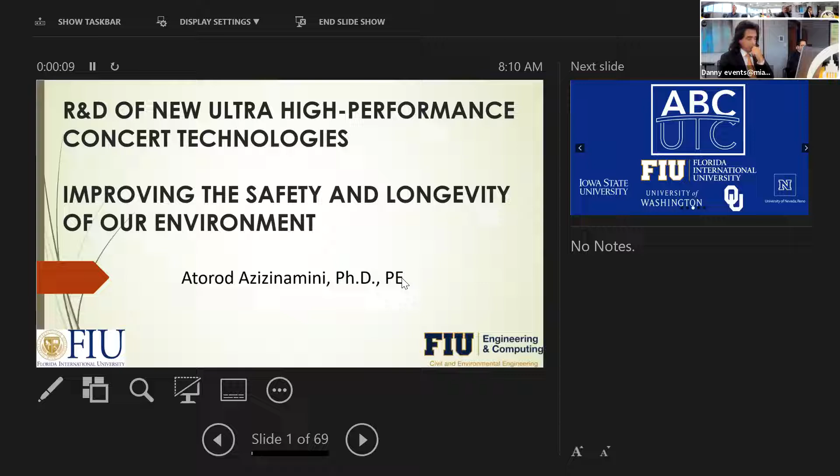Okay. All right. So, since 2013, we received funding from the USDOT. The funding from the federal government is about $1.5 million a year. And it's very competitive. There were close to 200 proposals, and then we were selected to work in bridge engineering.

And we've been continuously funded since 2013, and the recompetition actually is coming up because of the infrastructure bill that passed, so there's going to be recompetition again. So FIU is the lead, and we've got Iowa State, University of Washington, University of Oklahoma, and University of Nevada, Reno as partner universities.

Some of the technology that we are developing, that we have developed, has application to bridge engineering, but also has equal applicability to buildings, especially with some of the challenges we've seen after the Champlain Tower collapse.

So just to give you an idea of who we communicate with and what we do, I always say probably we are the best kept secret in South Florida, and I don't know what the reason is. I think probably the reason is that we get so much federal funding that in the past we have focused on addressing the problem at the federal level, at the national levels.

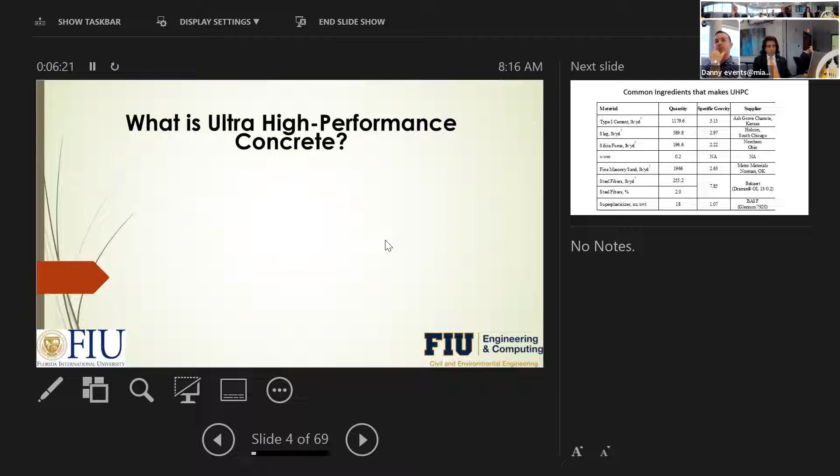UHPC was originally a product. It's a cementitious based product that was developed in France by Lafarge, and then they came to the US, and there's a proprietary version of it that is being marketed. It's really opening lots of opportunity for us, both in buildings and bridges.

I'm going to show you some ideas. If you want to know the recipe to make your own UHPC, I'll give you a copy—it's no secret. In fact, we have developed a non-proprietary version of this UHPC. Our idea is to make this available to everyone because we're more interested in application, not so much the material aspect.

The non-proprietary version that we've developed costs a fraction of the proprietary one. I'll give you some idea: regular concrete costs, let's say, about $200 per unit.

The proprietary version of UHPC on the market is very expensive, but you don't use as much—that's a big factor. It can go up to $4,000 or $5,000. But the non-proprietary version that we have can be at $800. That's significantly lower, and that's what we've developed.

Other agencies and institutions have developed it too, and I think within the next 5 years, you're going to see the price of UHPC produced around $800.

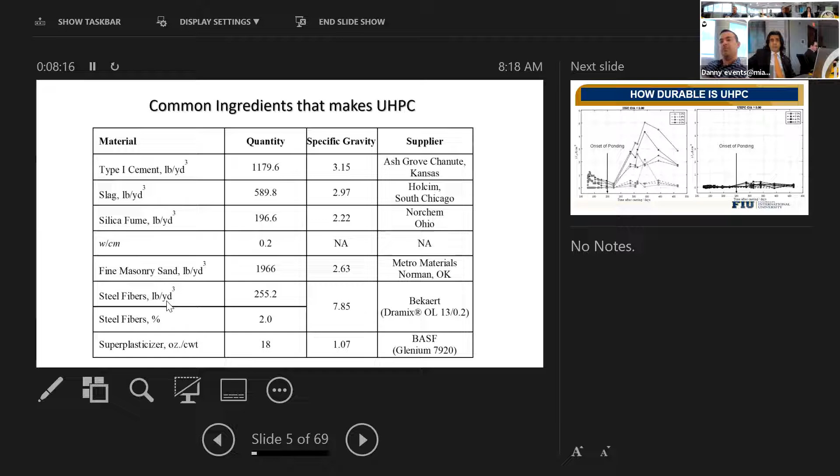For building applications, later on I'll show you an example of how much economy you get if you use it in high-rise buildings. You can bring the cost down because you don't need the fibers—the major cost of this material, since it's expensive, is fibers. But in high-rise buildings, in most elements, you don't need that. Then you can bring the cost down to almost $350, and the economy you get is significant.

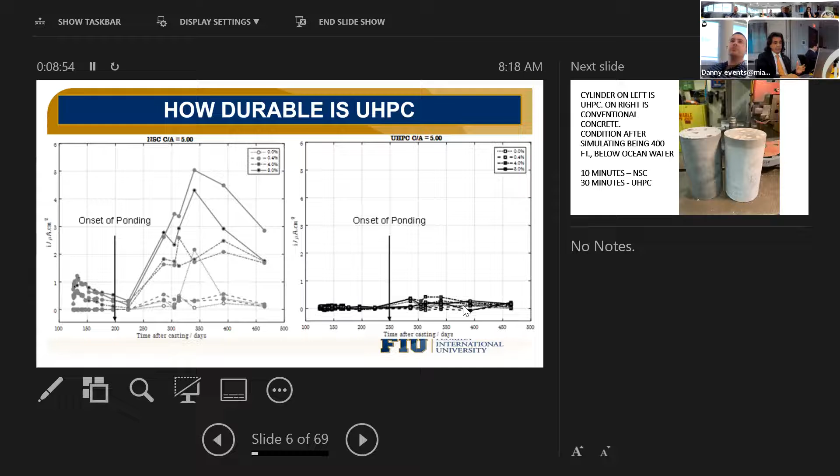This is a little better. We've very recently developed a non-destructive technique where in 10 minutes you can compare the durability of any concrete. Basically, we take cylinders and simulate that cylinder being under 400 feet of ocean water. Again, it's a patented product we've developed, but it's a very fast, quick test. For example, I can go to a building and do this test in 10 minutes. Right now we're developing a reference basis to compare the quality of this concrete to what else we have.

On the right-hand side, you see regular concrete used in construction. On the left-hand side, you see UHPC. The regular concrete on the right was simulated under 400 feet of ocean water for 10 minutes, and you see a ring above that, meaning the water seeped through. The UHPC on the left was simulated under the same 400 feet of water but for 30 minutes, and absolutely nothing went through it. So this is how durable this concrete is.

So if you have, for example, a high-rise building where you know the parking garage is going to be basically soaked, like a swimming pool during a king tide, just cover it with half an inch or one inch of this material. Or if you have a column that just needs fixing, all you need to do is patch it up.

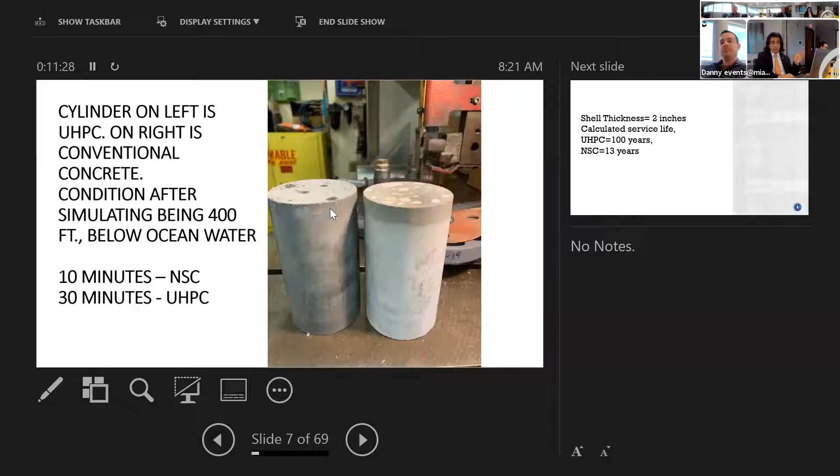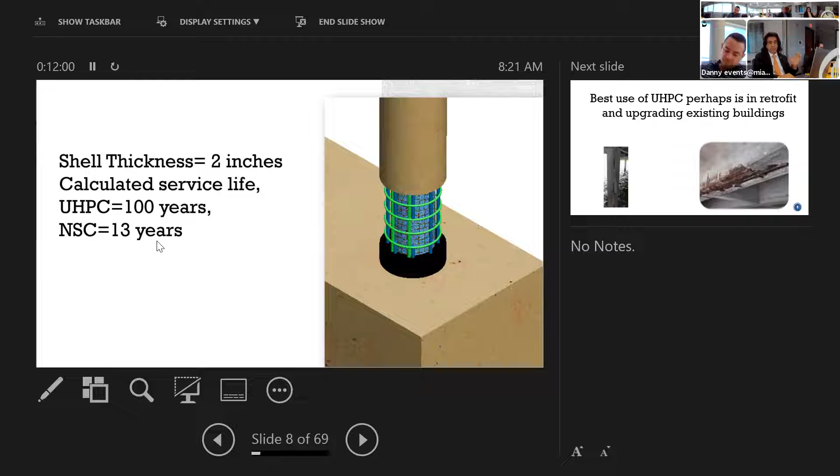This UHPC's best application really is for retrofitting - not building something new, but retrofitting and upgrading structures. You can bring it to a condition better than the original. Just to give you an idea: if I have a damaged area and patch it with UHPC, the service life is going to be 100 years. With normal strength concrete, it's 13 years. So which one would you use? At least for buildings and structures close to the shoreline, close to the ocean, we really have to use this kind of concrete. You cannot increase durability just by increasing the cover concrete.

A couple of years ago I went to Switzerland - I have good friends there, and I always look for a reason to visit. They've used UHPC for a number of years and upgraded structures. For example, the Venetian causeway bridges that we have - we can upgrade those bridges at 10% of the cost of replacement and bring them to a condition even better than the original with UHPC.

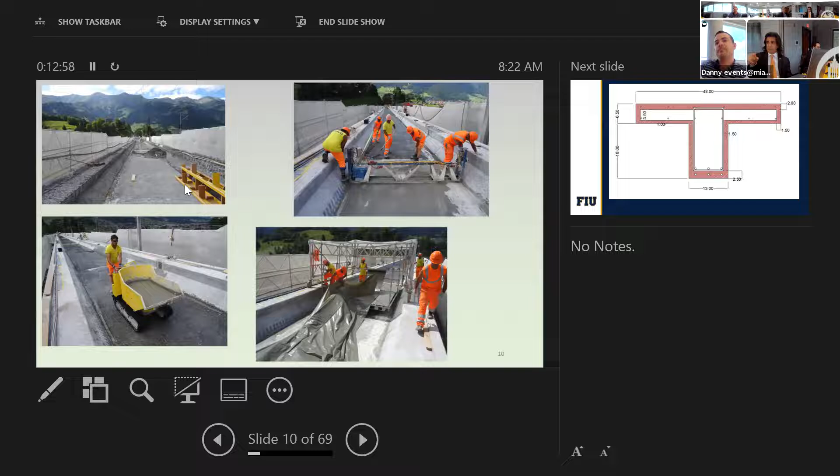I'll admit that - the Venetian causeway bridges, the superstructure part of it. I'll show you some of the technology we've developed that achieves that. At 10% of the cost of replacing those structures, you can bring it up to speed.

We've done some experiments. For example, we took the white area you see, like a T-section, a damaged structure, and wrapped it with 1 to 2 inches of this material. That protects what's inside - we use it just as formwork. And the capacity of this thing becomes 2 times the original condition, because this material is so strong.

This material, by the way, I forgot to say, has a compressive strength of about 20,000. What makes it so strong? It's because the material is very dense, compact, and has fiber, giving it ductility - you can actually bend it a little bit. So it's very high strength, very durable, and you don't use too much of it.

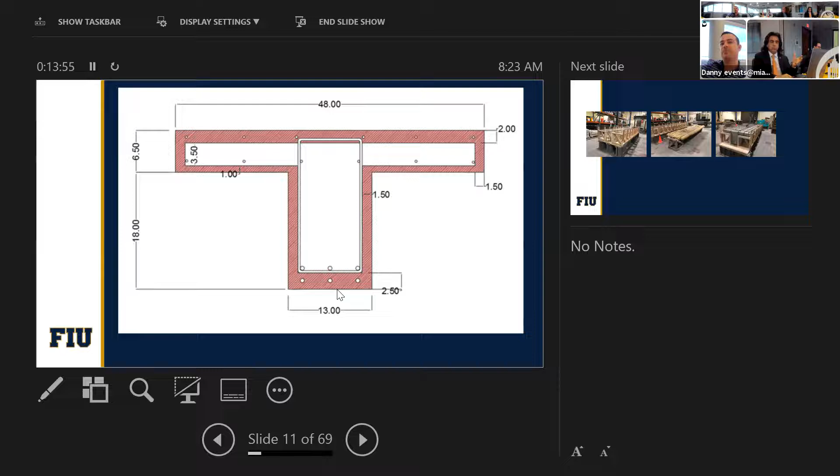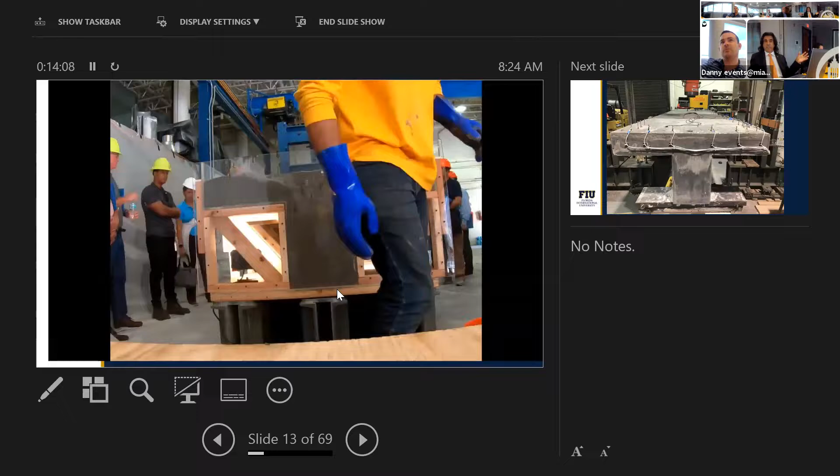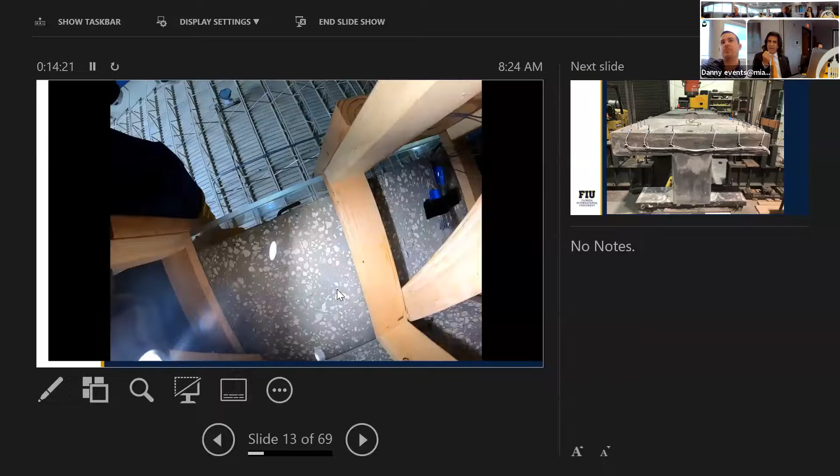For example, we took this and it flows. Just as an experiment, we built a formwork out of glass, put a damaged T-beam inside, and poured this UHPC in. It just flows because it doesn't have any gravel - it's very dense, compact, and has a very low water-cement ratio, about 0.2. So you can take any structure you have and just pour it.

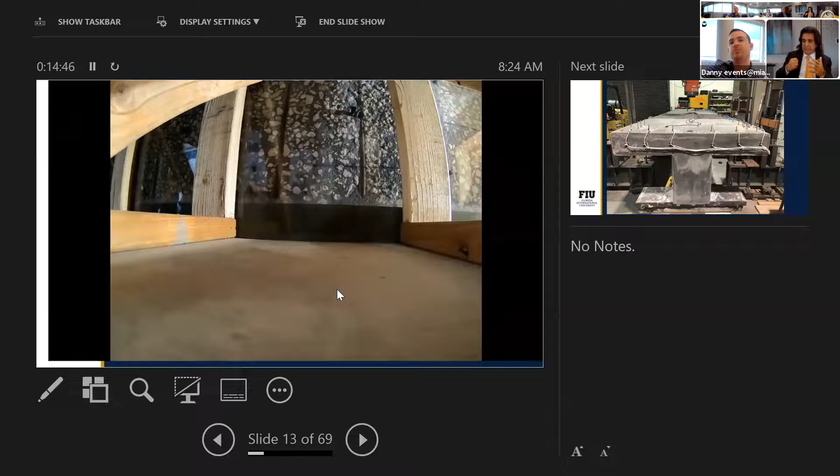The other thing is for hardening a structure for military application - it's extremely good. For blast resistance, for example, this concrete, because it's got lots of fiber and is very high strength, can take a lot of energy without really breaking.

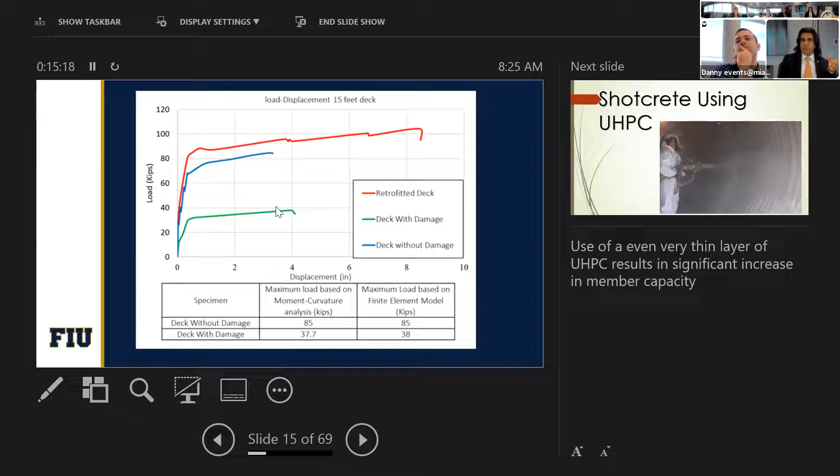We've done lots of testing, and this is before retrofitting - just look at the level, you go from here to here. Just by putting about 1.5 inches of this material and a little bit of steel in the bottom. That's why my good friend Eugen Brühwiler in Switzerland says, I don't want to call it a retrofit, I call it an upgrade, because after I'm finished, my structure is better than the original condition.

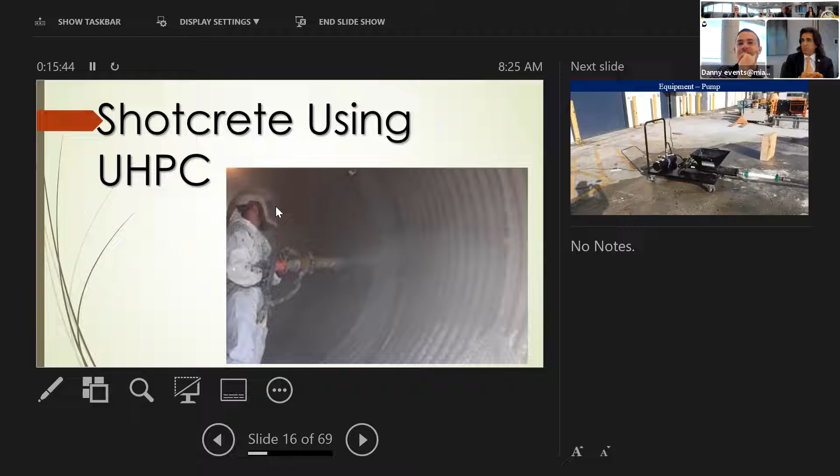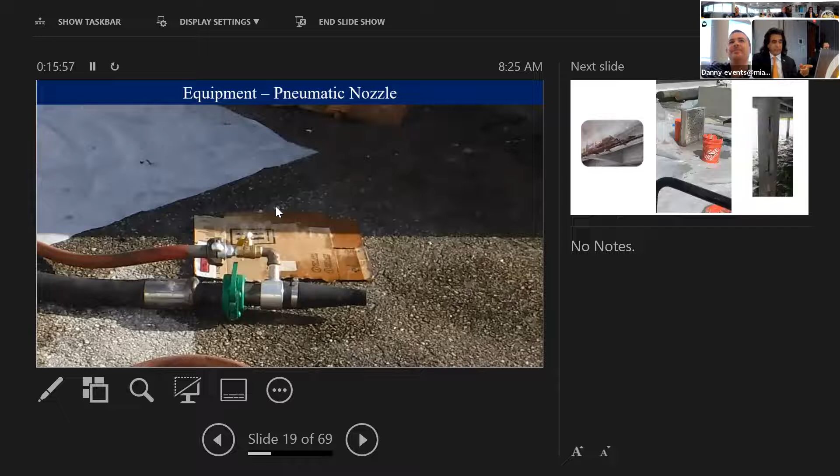The other thing we're doing now, which is new and not in the US yet, is shotcrete with UHPC. So what we do - say you have a structure, you go with a hose and spray this material. We're playing with this now; I think we'll be ready within the next 6 months or so. We've built our own pump and air compressor, and the nozzle is a customized nozzle that we built. Let me show you.

Basically, you just spray it. Now imagine you have a Venetian Causeway bridge, let's say. I go outside of it, I cover it, and I spray it. See how fast it is.

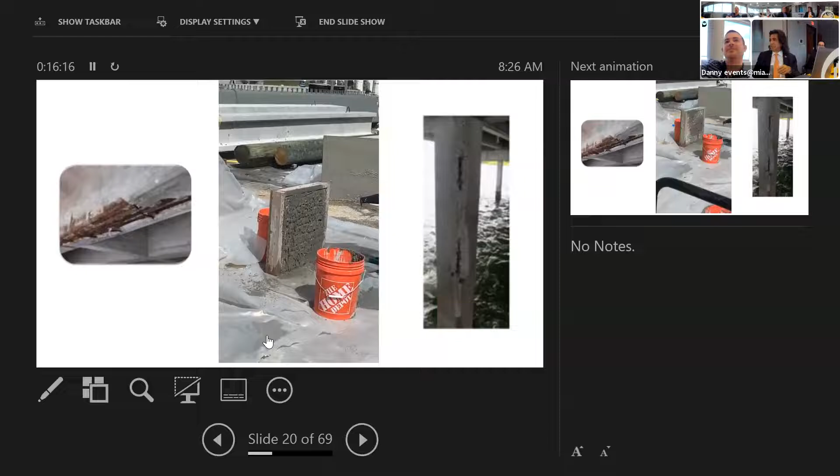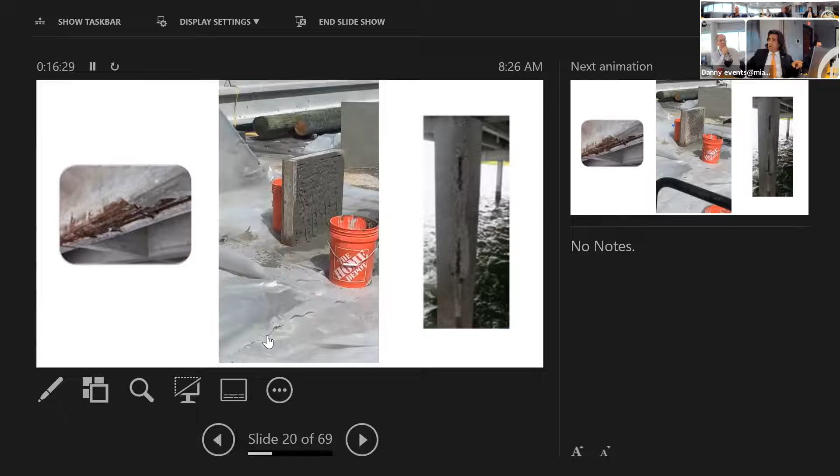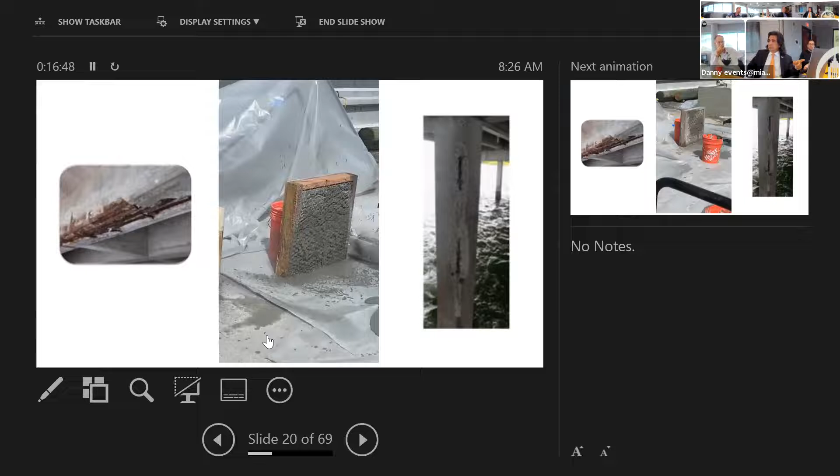So in the next 6 months, we're going to be basically having this. I think it has lots of applications because you don't need any formwork. You just go to the site and spray this material. Now, shotcrete using normal strength concrete has been done. What we have not done is shotcrete with UHPC.

The other area we are looking at is pipes. One of the reasons you see all these pipelines bursting and flooding is the water just seeping through. There are also lots of culverts that many states have. For example, one state in the Northeast has 500 culverts that they need to retrofit.

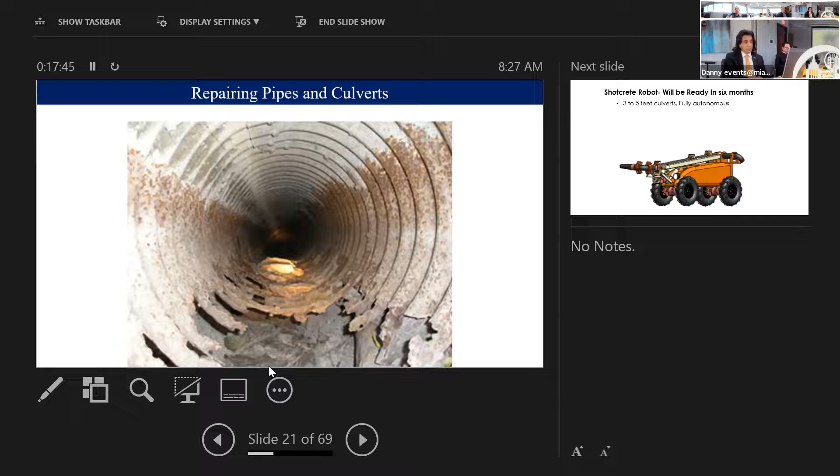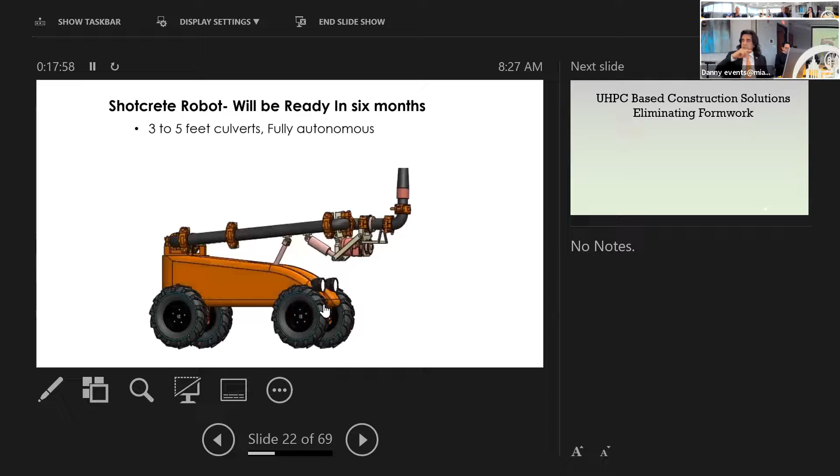So we have developed these robots. Right now these are all customized, we don't buy them, we build our own robots. Basically it goes in and has a nozzle that goes inside and just sprays it inside.

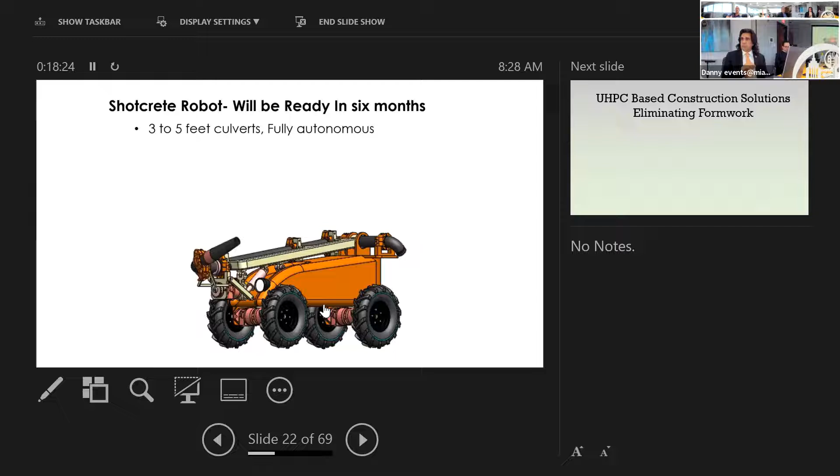Could it be used for pylons? My dock, there's wood piles, and then there's concrete that was poured around the piles to protect them. Could this be an application around that concrete to give it a longer life? Yeah, it is. In fact, I had one PhD student that just worked on that, and I'll show you some of the work.

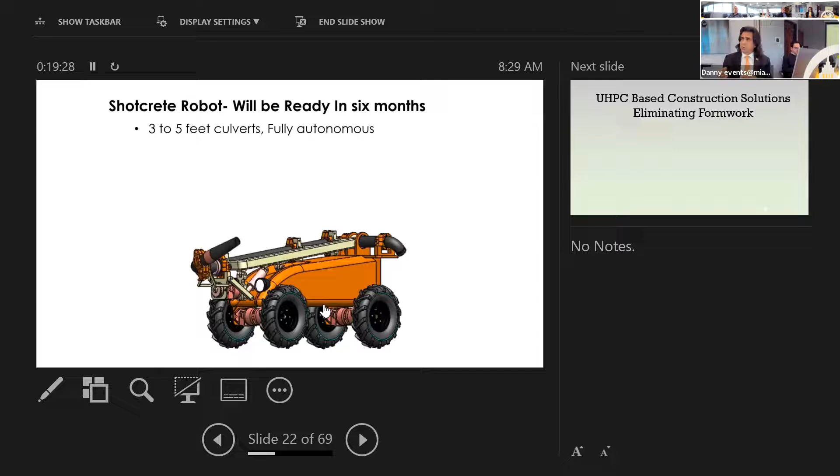We can take columns, for example. We are actually retrofitting wood columns, the piles, basically - timber piles - with the UHPC. There's a couple of things you got to worry about because the timber expands and contracts due to moisture content, and we have a solution for that so it doesn't affect the cover. But you only need an inch, inch and a half of this material, wrap it around it, and then you're done.

Question for you - normally on a building that's failing, the concrete is failing because the rebar inside has rusted and expanded. Right. You still need to go in and do those repairs to the steel before you apply the product.

Very good question. What happens when we wrap the structure with this material? It chokes it. In order for corrosion to progress, you need water and oxygen. When you wrap something with this, what we found out is that you don't need to remove all the contaminated concrete from inside, because once you wrap this thing, it chokes the stuff and stops the corrosion. With normal strength concrete, you cannot do that. That's huge. With this one, you can.

In fact, all I need is to go 1 inch beyond the reinforcement, and what's inside of that column, let it be. Is this an approved method for concrete restoration so you avoid having to replace the rebar? These are not - there is no body to approve or disapprove. It's the cementitious materials.

You are not going to see, at any time in the future, let's say the American Concrete Institute say that it approves or disapproves. They're not in that business. But it's based on something that people have used in Europe, and now we have taken it to a different level over here. And there is lots of information available that shows that it works.

I should ask Youssef. Is Youssef still with us? Yes, he's there. Youssef, are you there? Yes, I am. I'd be interested to know your experience with UHPC. I am aware of it. I haven't used it. In buildings they've used it for cladding, non-structural elements, but not structural elements, unfortunately. And Youssef, what's the reason you have not used it yet?

I understand the familiarity of the bridge community with this, but as an industry, it just hasn't been used. I don't think we have contractors that have used this or are qualified to use this. I'm not sure if ACI has any standards or publications for this, because that is one thing we use as a guide. It's not a code, but we use it as a guide for applications in buildings.

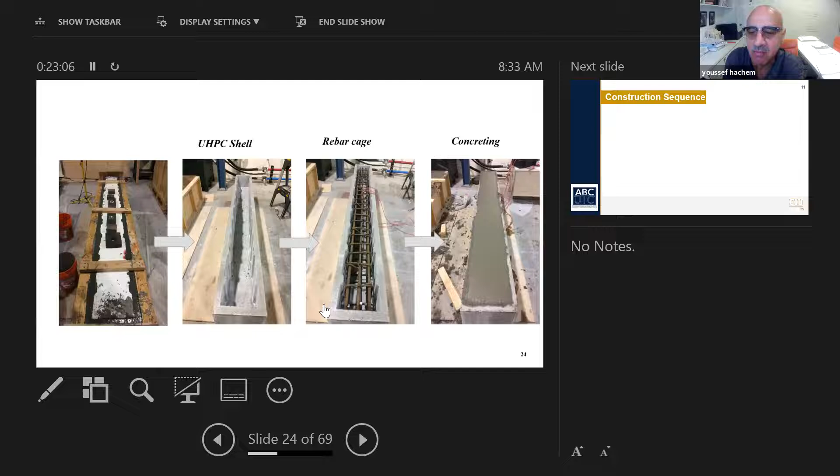Doctor, correct me if I'm wrong, but does ACI have any publications? ACI is working on it, but the Federal Highway Administration does have standards, though more for bridge engineering, not for buildings. ACI is in the process of developing them. ACI has provisions for high-strength concrete, but in most cases they limit the strength to 10,000 psi. There is no ACI standard specifically for UHPC. But in the bridge industry, Federal Highway Administration, Ben Graybeal and that group, there is a ton of material out there. We're very notorious for being slow.

Let me tell you why it has not taken off. I won't name the company, but there is a company that has a proprietary material. We have a tendency that anytime we put a name to a material, we kind of shoot ourselves in the foot, and it becomes a new technology. This is a cementitious material, right? And contractors don't want to take the liability: if I mix it and something goes wrong, who's going to be liable? And the company marketing it has been using that as a scare tactic, saying if something goes wrong, you're going to be liable.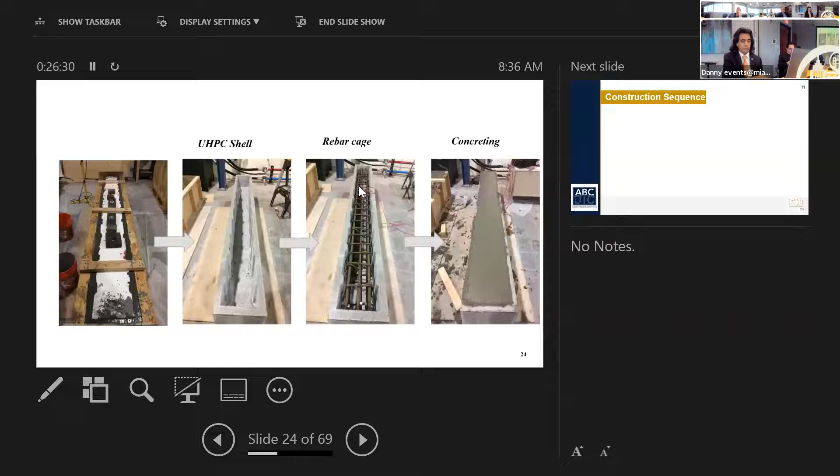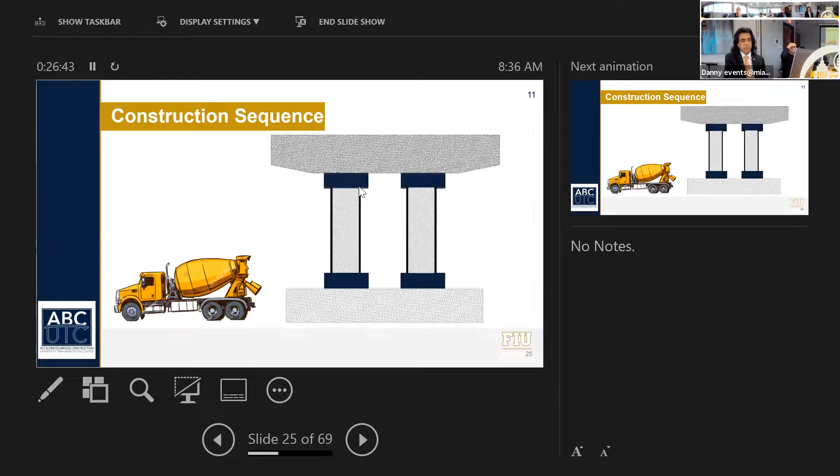So in the bridge industry, this is how it works. Basically, you put those shells, and then you've got basically your structures. You can't see it, but in these columns, only the shell is UHPC; inside is normal strength concrete. Okay.

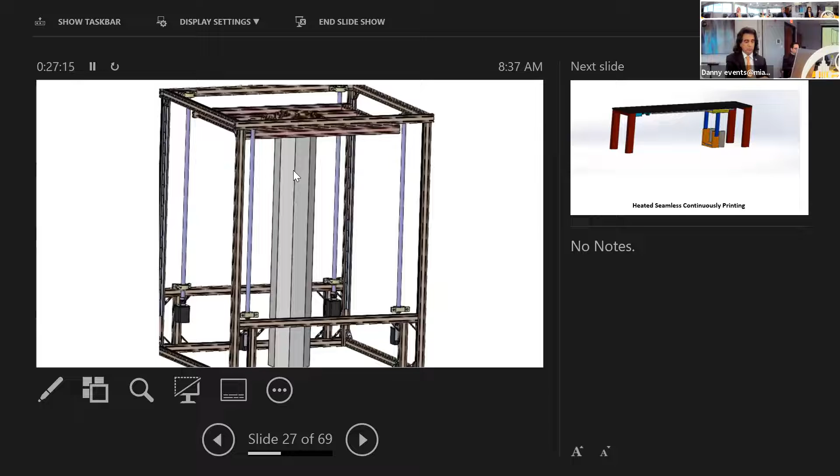Now, you've caught me at a good time. Within the next few months, we are working on 3D printing with UHPC. We're going to be printing very soon a column that is about 10 feet tall. So you can print these things now. We are moving to printing both horizontal and vertical elements. This is one thing that was printed with UHPC.

What's the benefit of printing versus just your normal? Oh, it's just the formworks. You can print the formworks with 3D printing. You can do that 24 hours. Robots, you don't have to pay overtime. So 3D printing, automation in construction, is coming, and it has lots of different applications. It's one of those things that's here.

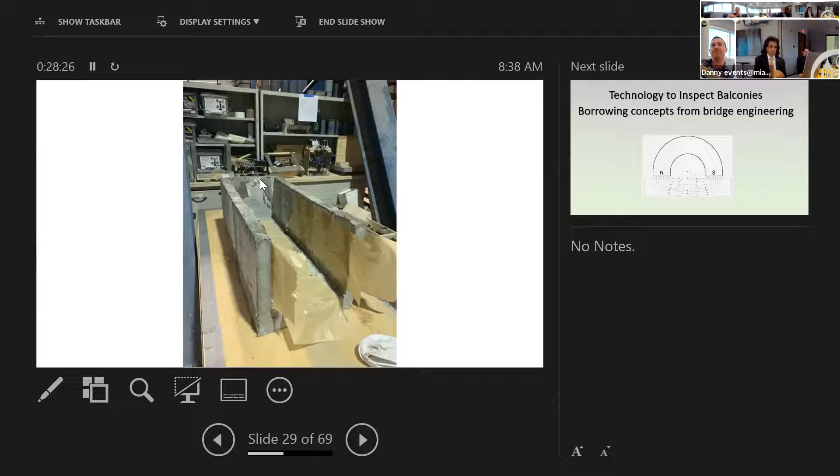You get higher quality. For example, in the case of a bridge, if you have a bridge that has 20 spans, there are so many columns, so many elements that are repetitive, and if you can print all those things, you're in business now. Right? So 3D printing is another.

Moving on, another thing I wanted to share with you. We've developed technologies that might be of interest to some of you that we can borrow from the bridge. We've developed technology to detect corrosion. So if you have, let's say, a parking garage with columns and you don't know the condition of the steel inside, we can use this method. Balconies, for example, usually have post-tensioning rods that are holding the balcony.

A friend of mine asked me to look at the inspection report for a high-rise building. They had a problem with the balconies. I looked at the report, but there was nothing in there saying the inspection knew the condition of the post-tensioning rod inside. You have to know that. If you don't know it and you can only see the end of it, you're not doing anything. In fact, you're covering something that may cause more problems.

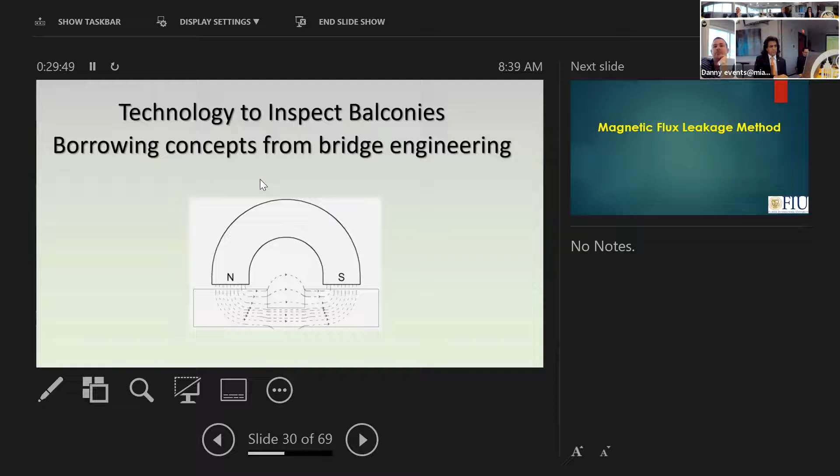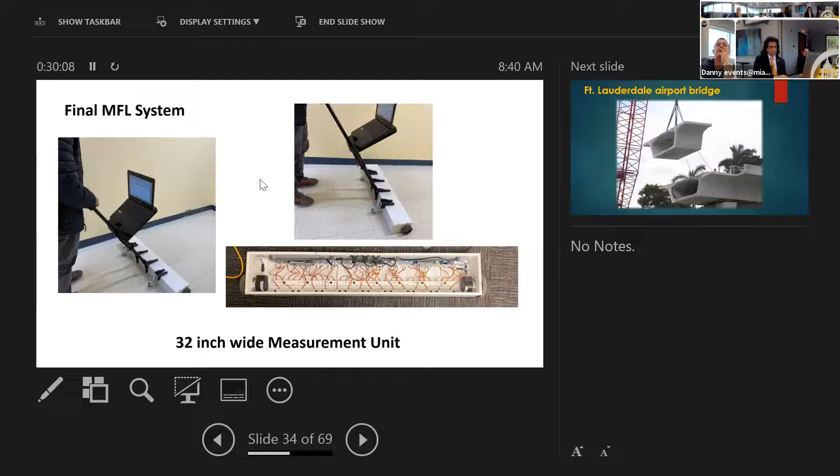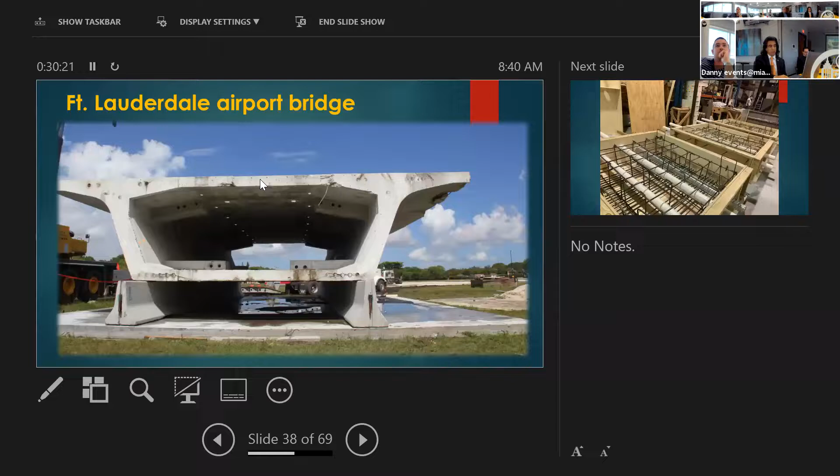So this method, a magnetic flux leakage method that we've developed, is based on the magnetic field. The magnetic field changes when the steel loses section. We have the complete equipment. We've done this for many years, and with a good friend of mine at the Technical University of Berlin, we have perfected this technology. We've tested it on some segments of bridges that we brought to the lab.

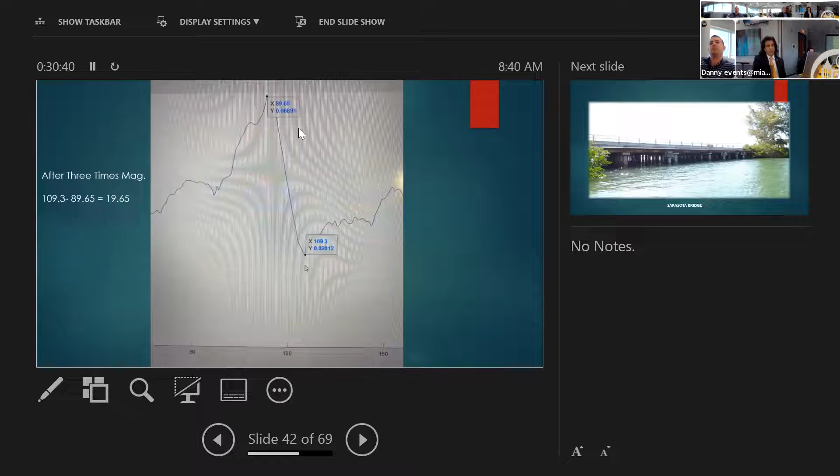So you put any kind of rebar that has any element of corrosion, and we can tell you where the corrosion activity is, with confidence. So, Doctor, as a building contractor, how can we access this technology? I'll tell you in just a few minutes. That's a good question. We are open to suggestions.

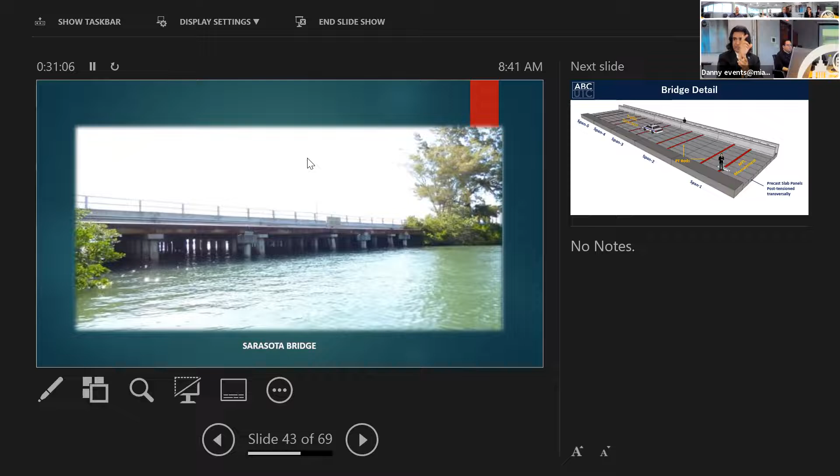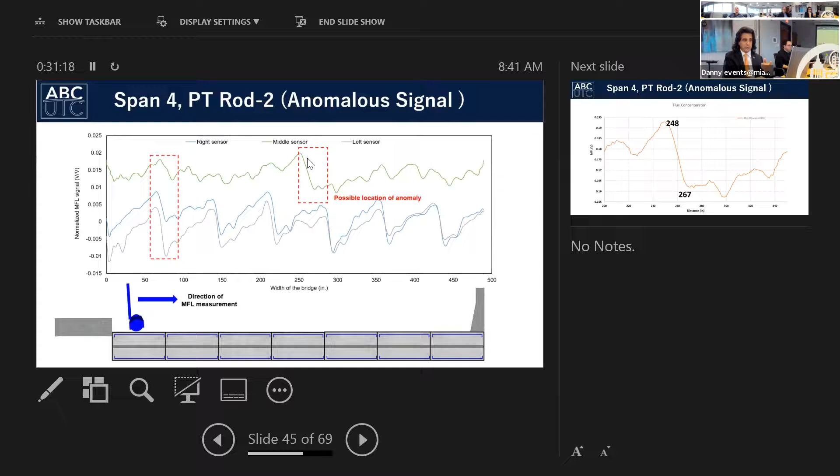But we've tested bridges where they actually went in with a borescope. They looked at the condition, and we did the test. We compared with the borescope, and we were able to match the information. We didn't have the borescope data, but we were able to say where the corrosion is.

To answer the question, this is proprietary know-how belonging to the university and the college, and we are in the process of establishing an LLC that provides this corrosion detection, and we are hoping it will take off fairly soon.

But it's not really something that you can give the device to somebody and say, go do it. You have to have trained eyes. You have to basically use artificial intelligence now to detect the corrosion and all that. But it's there. So we can penetrate through about 20 inches. So if you have a steel element that's 20 inches from the surface, we can scan it, and we can kind of see what's inside.

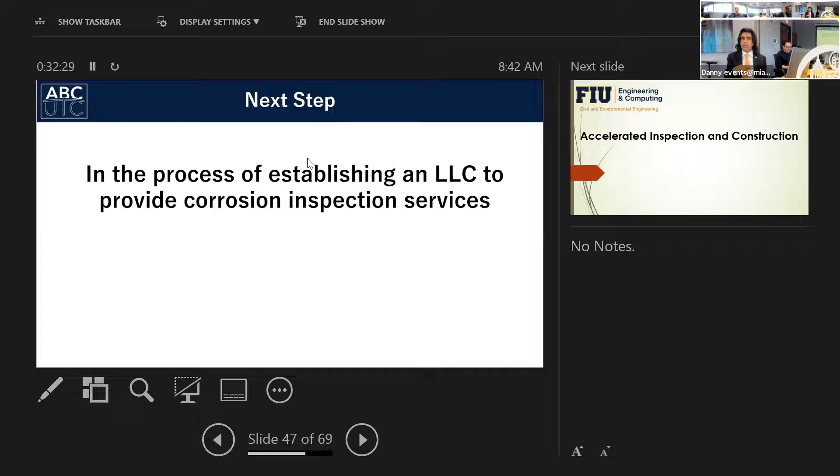What we've been able to do now is that there are all kinds of other reinforcement in the structures. So we can zoom in, basically like MRI, we can zoom in on the area that we are interested in. Is that basically what it is, MRI, magnetic resonance imaging? Very similar to that, very similar to MRI.

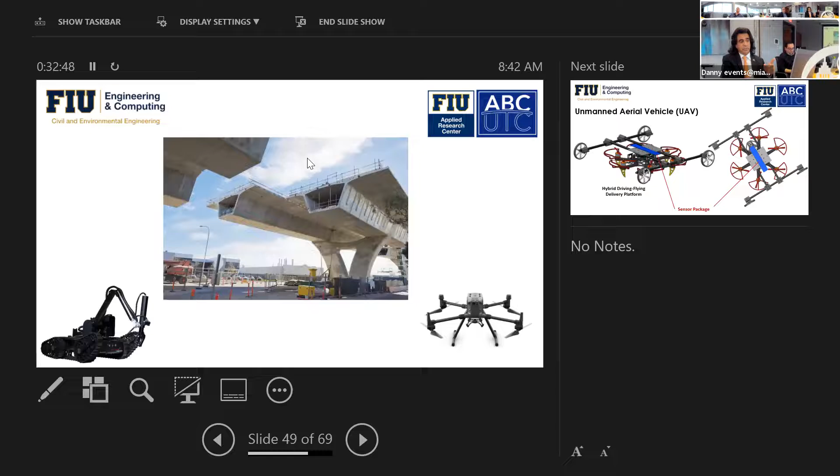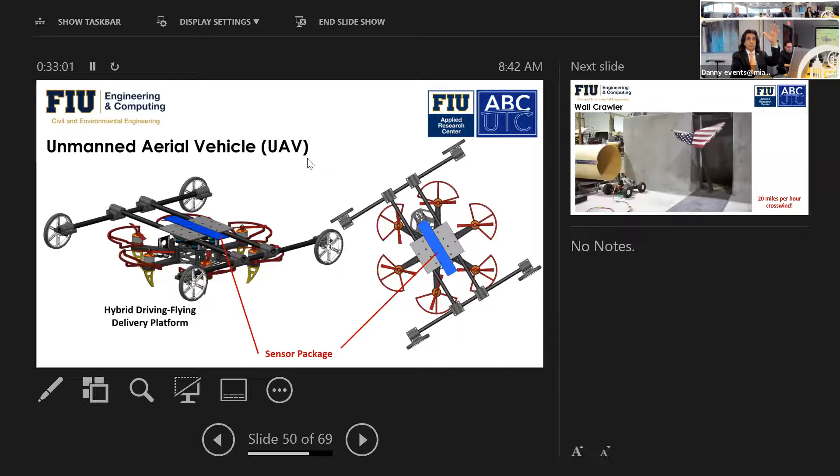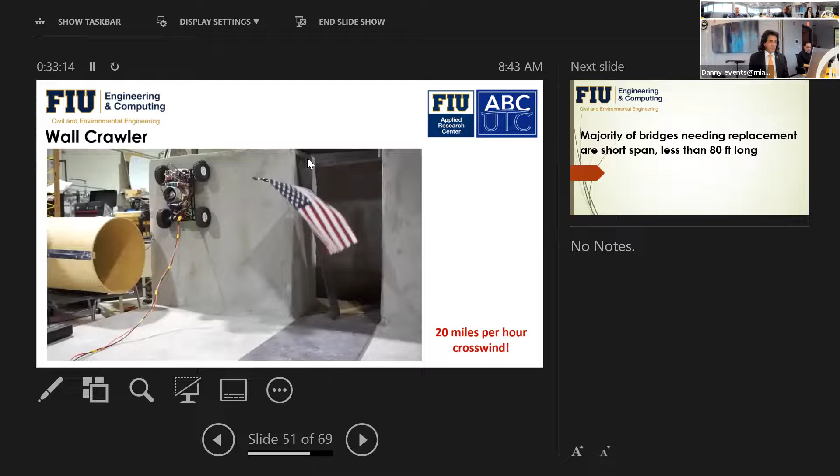So we have lots of toys that we play around with. So this is just one of them. I mean, there's different versions of it that we have. Lab.

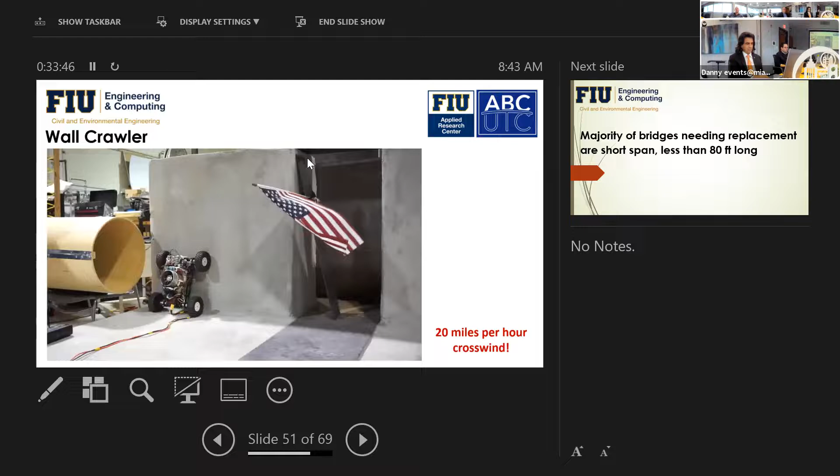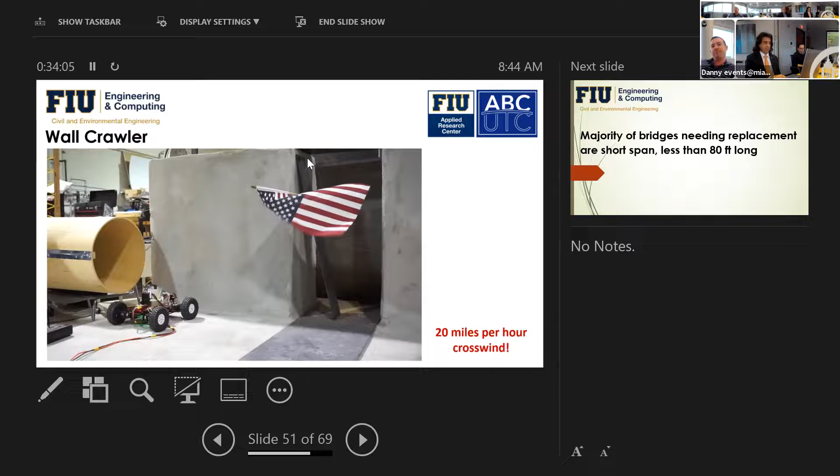Downtown. Are they using UHPC? We are actually, I've been trying to, are they using a UHPC unit? To my knowledge, I don't think so. I don't know. I haven't been involved with that. That's a good question. In general, in the long term, UHPC has much lower maintenance, so once you cover it, nothing penetrates through it.

So, could you speak to us about the legislative level, why is this not a standard? Why is this not a requirement for all buildings? Let me answer these questions. I think after the Champlain Tower collapse, in my opinion, we need to develop what's called a building management system. That means we need to look at the way we inspect the buildings, who should be inspecting the buildings. We need to have protocols. You have to develop a system.

You have to provide the information on how to retrofit things. And there maybe UHPC can come in, but I don't believe we can just take UHPC and say this is the solution. I think we've got much bigger challenges in hand, and that is, for example, the approval of the plans. Just take it from there.

When I looked at the Champlain Towers, I noticed several things. Of course, that was designed back in 1971. The shear walls, in one direction there is a little bit of a shear wall. In the other direction, there is none. And the foundation is not tied together. So there is a nonuniform settlement that can take place. Some of the details, of course, were old.

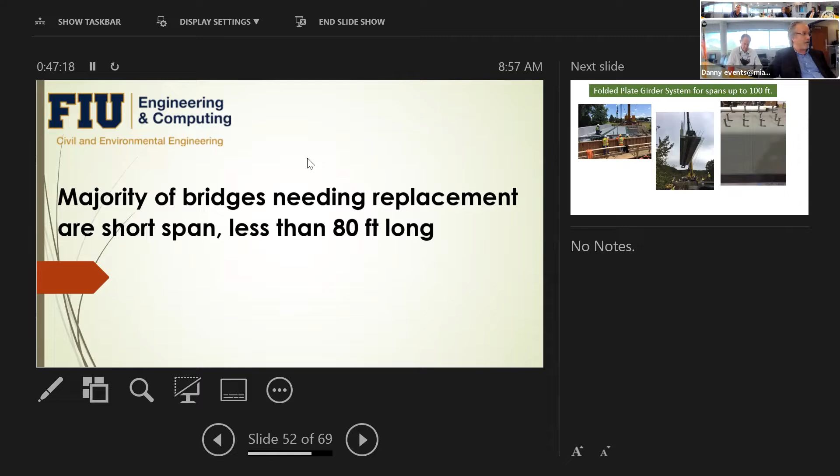Well, as interesting as this is, we're pretty much out of time. Do you have any closing things you want to mention that we didn't get to?

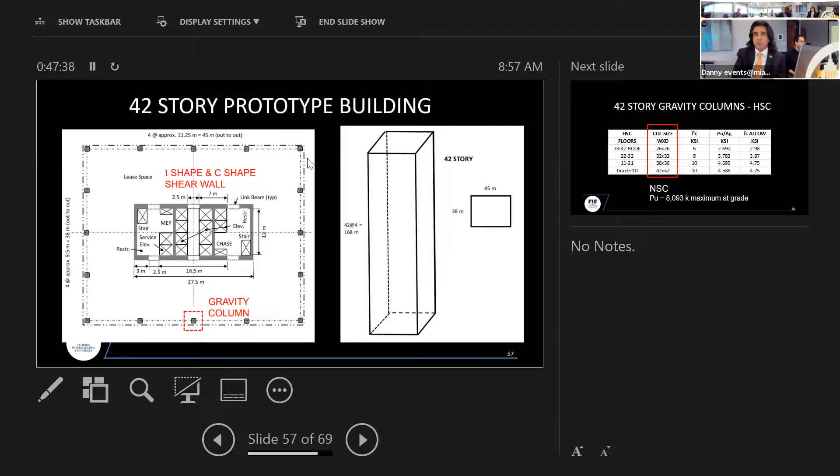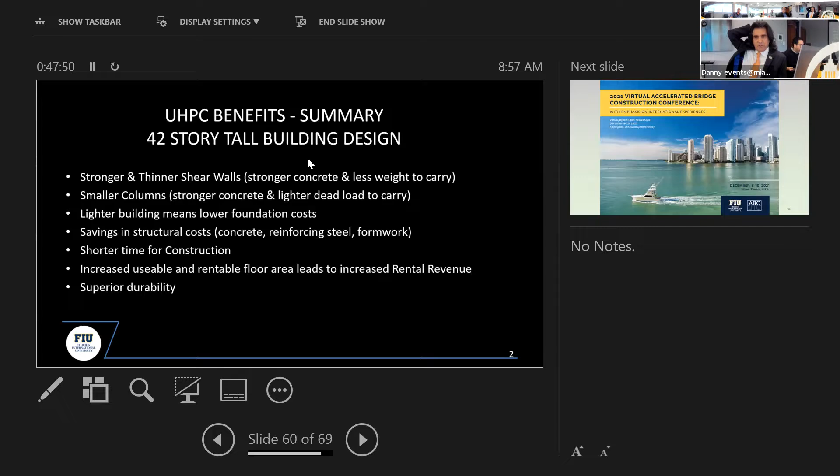I'm just going to show you, for the people who are building, with myself, Joe Colaco, and actually Larry Griffis, we designed this 42-story building with UHPC. So architects, these are... we have lots of data. There is a big economy. You can reduce the cost by about 10-15% in this case.